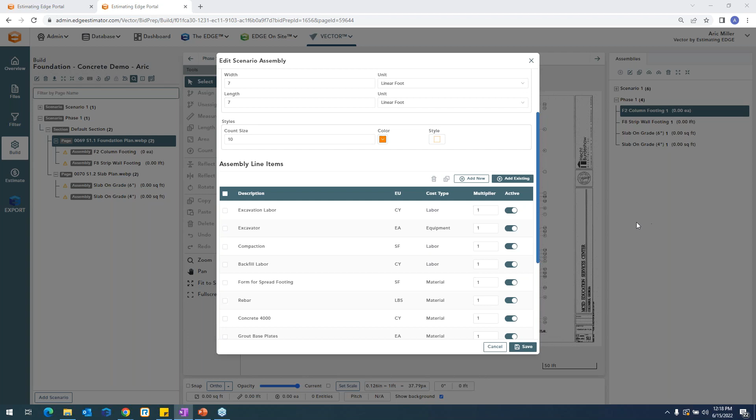And lastly, I'll look at our F2 column footing here. This assembly is set to count, so we're going to be measuring eaches—pretty straightforward. Hopefully now you're visualizing some of your own material and labor costs that are grouped together, but this is really how we can help take you to that next level. All these assemblies can be customized however you see fit, and we have the capabilities to measure practically anything you upload into Vector. So now, since we've talked about assemblies, we can actually start the takeoff process.

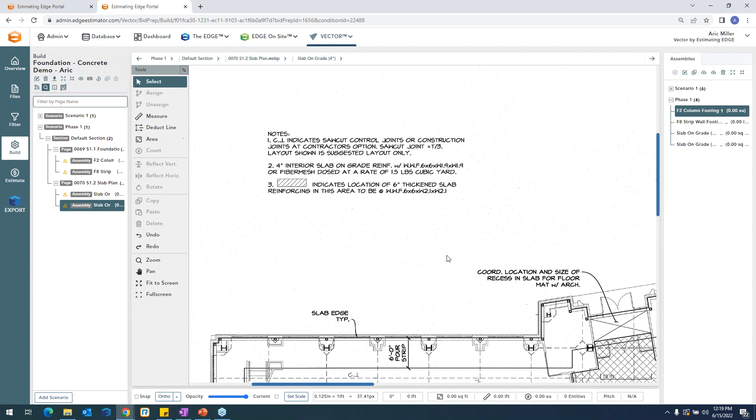So I'm going to go into my slab page here and select my 4-inch slab. I'm going to make things a little bigger so everyone can see. I have my slab plan here that I'm looking at, and I can zoom in on the notes using my mouse and the scroll bar, dragging in. I can see we have a scale down here below, but let's set the scale our own way—there's a little set scale button on the bottom, and I'm going to hit this button.

We can do it a couple different ways. We can select the standard scale which the architect has given us, we can do a custom scale, or we can measure our own line to verify their work, which is what I'm going to do today.

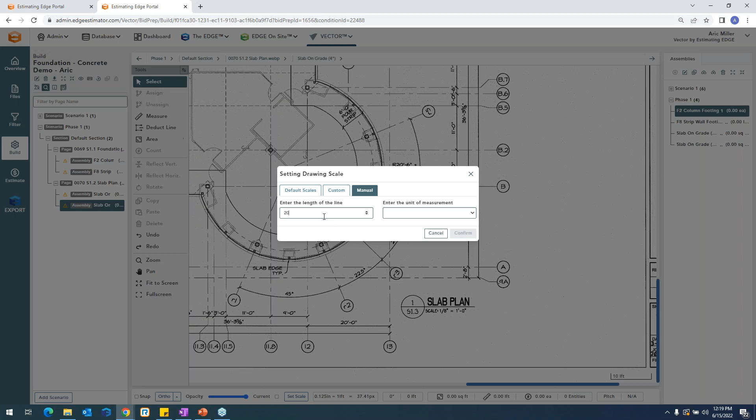So I found a nice, easy line I can measure here. I'm going to click 2 points, enter a number, 20 lineal feet, hit confirm. And you can see we're pretty spot on with that measurement here.

All right, so now we can begin to take our area calculation. We're working with our assembly here, you can see it's clicked. Now we have the option to depict what type of area calculation and line we're going to draw. When I click on the area shape, you can see I have some options of what sort of shape I'm going to draw. For this first shape, I'm going to be using a polygon line.

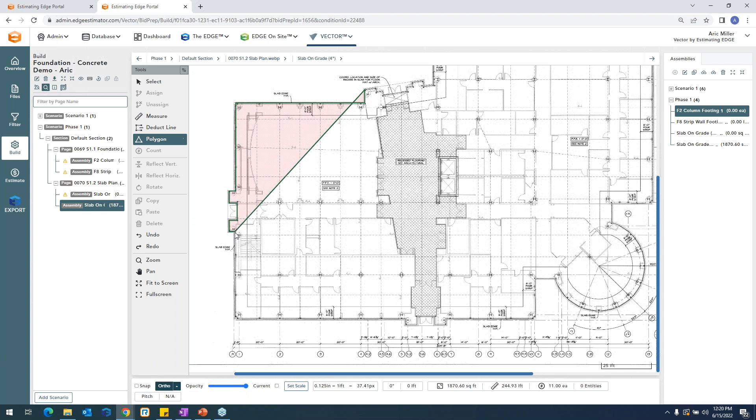Another feature that makes things really fast and easy is this ortho button down here. I'm going to select it, and that's going to make it so I can only draw clean, 45-degree angle lines. I'm just going to left click and start drawing my shape, clicking through as the corners go. You can see how clean that is as I'm going through drawing. It just makes it really easy to make sure you're doing straight lines, sharp corners.

Now these next couple of lines you see are a little bit more of an angle, and this ortho button doesn't work. All I have to do is hit the O on my keyboard, and that's going to turn off ortho. Now I can start drawing and really fit the needs of the actual shape, and continue my takeoff here.

On the left, I know you can barely see it, but that information is actually updating right away, giving our measurement as we move through the shape. Almost done here, so now I'm going to hit enter, and now we have that saved.

Pretty cool, hopefully that looked as easy as it felt, but look how clean that is. Vector easily allowed me to modify my drawing capabilities as I'm in the middle of my trace, to match the shape I'm drawing. So let's see what's next here.

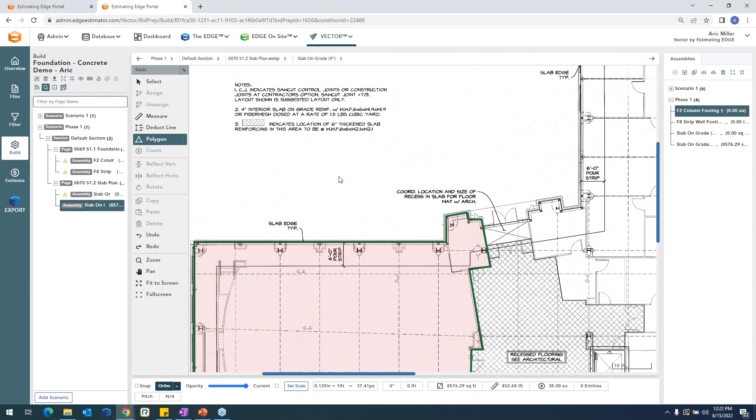Number 3 indicates we have a 6-inch thickened slab. So let's find that, it's up at the top here. You can see how easy it is for me to maneuver around the screen. I'm going to select my 6-inch slab. We have ortho turned on, look how clean of a shape this is. We're going to use our polygon once again, and I'll just left click and start tracing.

Sweet, so we got that taken care of now. Once again, you see those calculations are updating on the left, and we have our 2 area measurements. So these simple polygon shapes like I did there, you guys are going to be able to fly through those, once you get a little bit more familiar with the system.

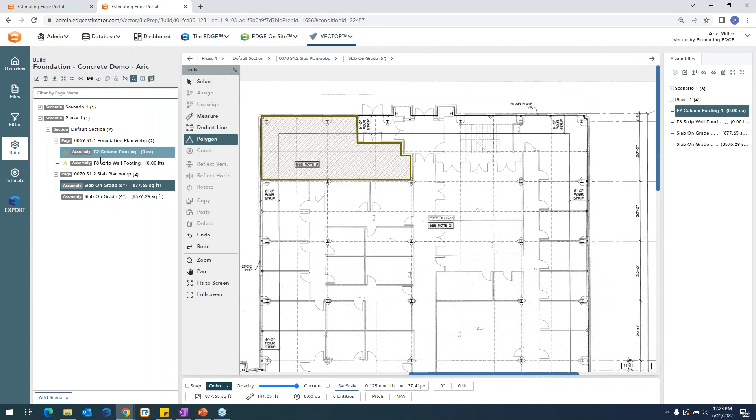So let's move on to our other 2 assemblies I've added, and let's get into our count assembly here. We're going to work with our F2 column footings. We're going to go to our foundation page. Once again, we have our scale.

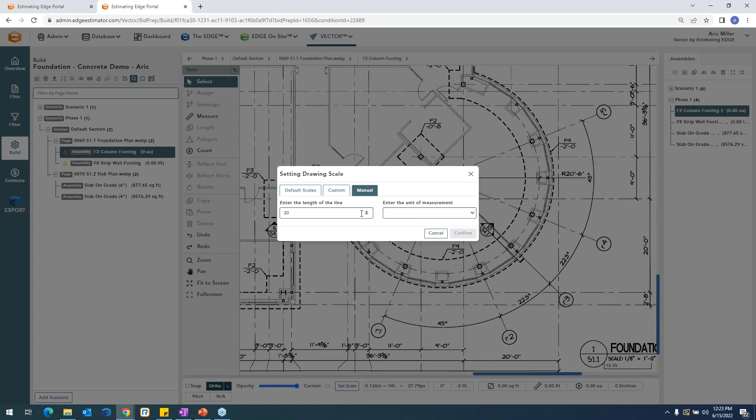We can quick set that again, just to show you guys how really easy that is to do. Just hit the manual process, we'll measure the line. Once again, we'll enter our number, feet, and boom, we're all set.

So now we're going to be counting, and we're going to work with some F2 column footings here. Let's take a look at a plan. We have a number of different footings that we're going to be working with here. Prior to the demonstration, I actually created an F2 column footing assembly for us.

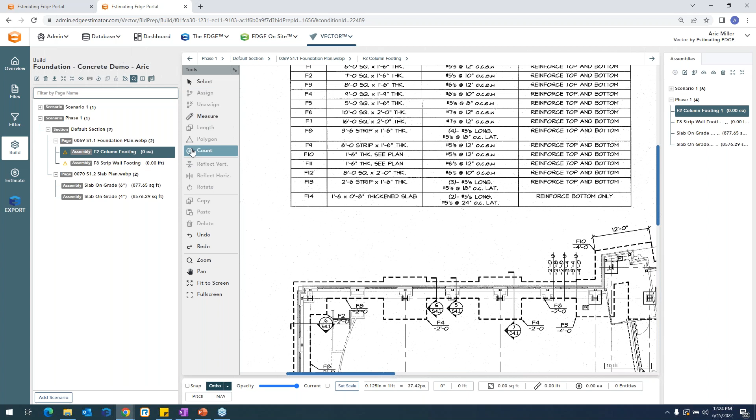To do the count, it's very similar to start the takeoff process. I'll click into that assembly, I'll hit the count fixture, and then click wherever my F2 column footing goes. And that immediately updates there.

But if I scroll through here, I can see, if I kind of pan through, I have an F4 here, an F4 here, an F3 here, but I only have an F2 assembly created, and these are all going to be different measurements.

No problem, we can easily copy an assembly and modify some of the measurements, the length, the width, to meet the needs of the plan, and then quickly add them to the job level. So I'm going to select my F2 column footing, and let's take care of this F4 here. So 9 squared, okay, we're going to hit this copy here, and this is going to bring up a copy of that assembly. We're going to rename it to F4.

We're going to change our height, change our width, change our length, and then we're going to go ahead and hit save. And now we've added that F4 column footing to our assemblies. We have a brand new assembly.

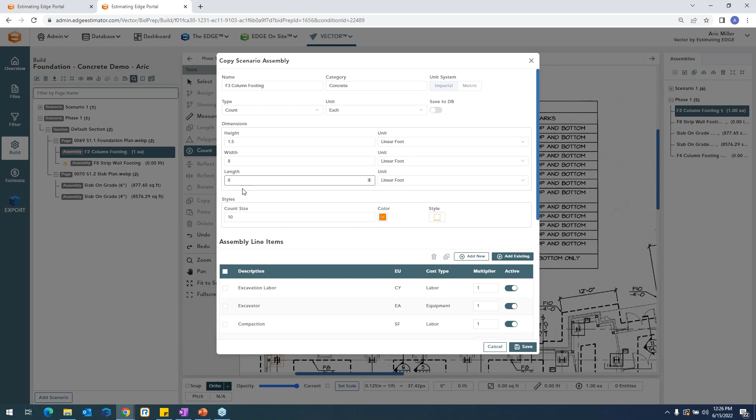Let's do the same thing with an F3 here. So we have an 8-foot square. We're going to hit copy one more time. It's going to pull up the name. We're going to do F3, 1.5 linear feet. This is going to be 8. This is going to be 8. And I'm going to hit save once again.

I'm going to go into our page. I'm going to add our new column footings that I just created, this F4 and F3. Click add. Those are now added to my scenario page here. And then I'll go through and click the F4 and simply start my count there. And then we have an F3 here.

So pretty neat, but as I talked through that, we easily created 2 new assemblies for takeoff. We can leverage these for future takeoff as well by clicking the sync to database button, and that way we can use them later on. But I really want to emphasize the ease and flexibility of creating a new assembly, consisting of material costs inside of Vector while working through the job.

Now, could we have done that prior to doing takeoff and have the plans and go inside our database? Sure, but over time, we're going to be building a clean database full of items and assemblies, and this should only speed up as time goes on, because you're going to have your own understanding of your database, your items, and those sort of things.

All right, so let's move on to our last assembly, and that's going to be our length calculation, and that's going to be our strip wall footing here. Okay, so I'm going to select my F8 strip wall footing. You can see after I selected that, we now have a length measurement that comes up, and then we have some options for what type of line we're going to draw.

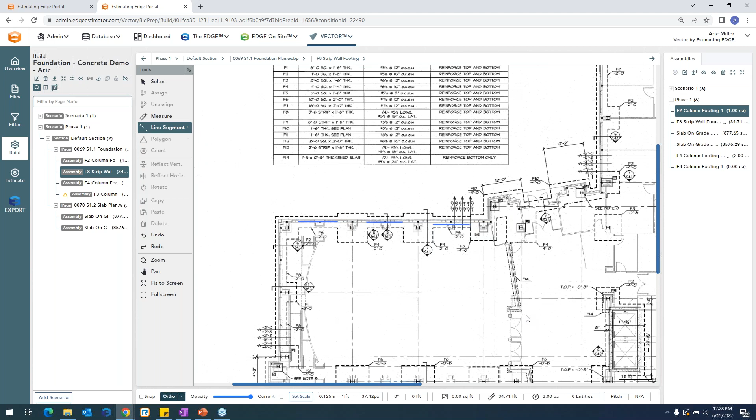Now for example purposes today, what if we wanted to maybe draw some different shapes? You see we have sort of a half circle shape listed down here. Let's say we wanted to measure the length of this. I click inside 2 points, and then I can start measuring this out to meet the shape. Now we can also do this with area as well, but you can see how smooth that was when you're dealing with different shapes and when I'm dealing with different scenarios, whether I'm counting, measuring length, or even volume, which I know we didn't go into, but our system really makes it easy for you to perform that takeoff.

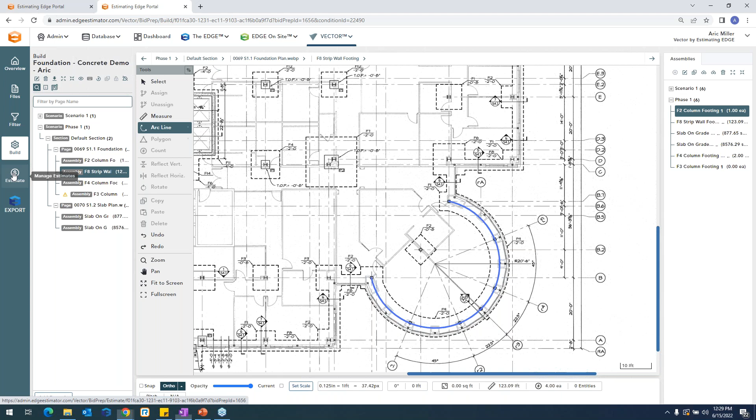All right, to keep us moving, let's get into the estimate screen. So we have the takeoff portion, the task that we wanted to completed today, that's finished, and let's hop over to the estimate screen. Now remember, I mentioned earlier, Vector has an estimate tool available in the same platform. So there's no need to transfer documents from system to system. All of our calculations we just did are going to flow here to our estimate screen, and we're just going to finish our pricing here.

So here's the estimate screen. I know this might look like a lot of information, but it's simply all of your materials, subcontract, and labor costs listed out for you. Now we're going to use our industry knowledge and project familiarity to really finish our estimate. But we can break things down a little easier for you and maybe isolate certain items, based on those categories we talked about before. So you can see now I'm looking at non-labor items. Let's jump over to the labor items.

You can see all of our labor items listed here. I have a stone base install. Say I want to start entering in some values here. We'll say $50, and you can see that net cost updates right away. Let's say we want to be more exact and know exactly what's going to be given, I can enter in a flat number, and that's going to automatically update those fields right away.

So let's go back to non-labor items. We can see some equipment, excavators, and you'll notice that some of those items are listed in green here. You have the option to use this checkbox next to it, and that's going to save that item pricing to your database. So the next time you come into Vector or use that item, pricing won't need to be adjusted. But you always have the ability to adjust pricing right here at the job level.

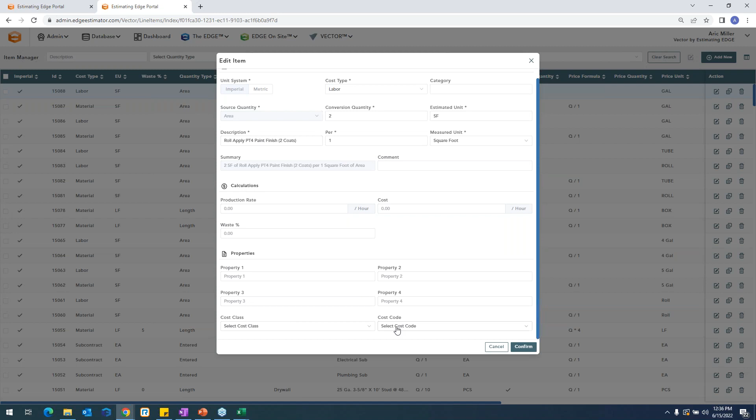Perfect, thank you Steve. And when he was touching on those cost code and cost class, if I go into one of my items here inside Vector, you can see down below that cost class and cost code. So that is where that API integration comes into play. Thank you, Steve.

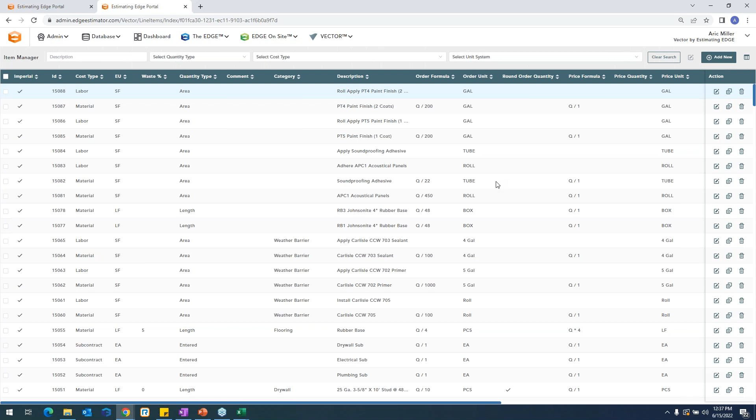Next question is, can you create a new item in an assembly? Great question. We touched on creating a new assembly inside the job, but you can do the same thing with an item. If I wanted to copy this assembly and bring in a new one, I have my assembly name referenced from when I copied. You can see the line items down below, and I can add existing, or decide to add a new line item and create my own from scratch.

Happy to walk anyone through how this would look. Contact us after we're finished, and I can show you more about this process in a more personalized demo.

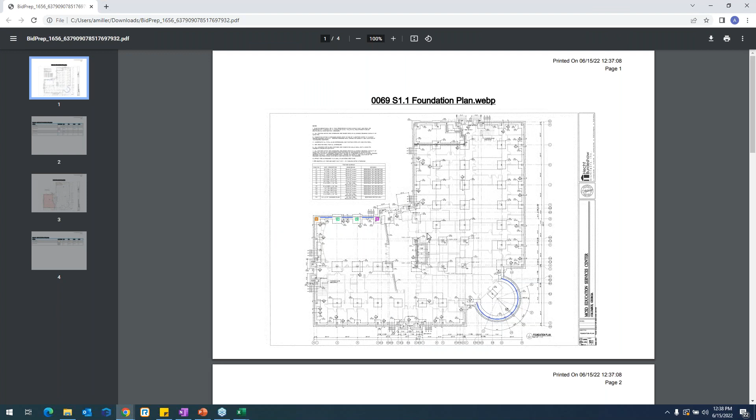Looks like we have two more. Is there an indication or legend for our drawings of what we measured? Awesome question, we do have something very similar. If I go into my scenario here and click on scenario, you can see this download report button. I'll click download report, and it'll project this screen, which indicates everything I've drawn. It'll show me a legend of what I'm working with, what type, and the same thing for my area calculations here.